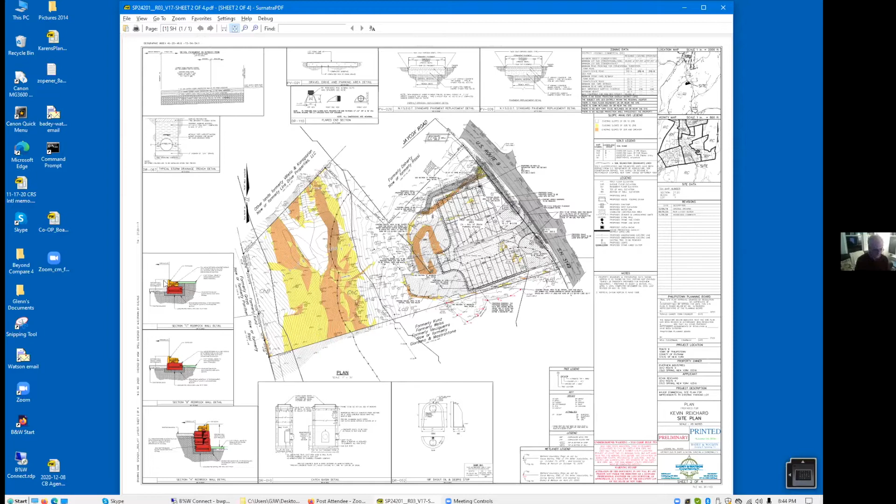So just to give you an idea, if I can maneuver myself a little bit — here's a detail of what we're talking about. The rock would be, essentially, a bunch of large building blocks. They're on a drain stone foundation — I'm pointing with my finger instead of my cursor, sorry — they're on a built foundation.

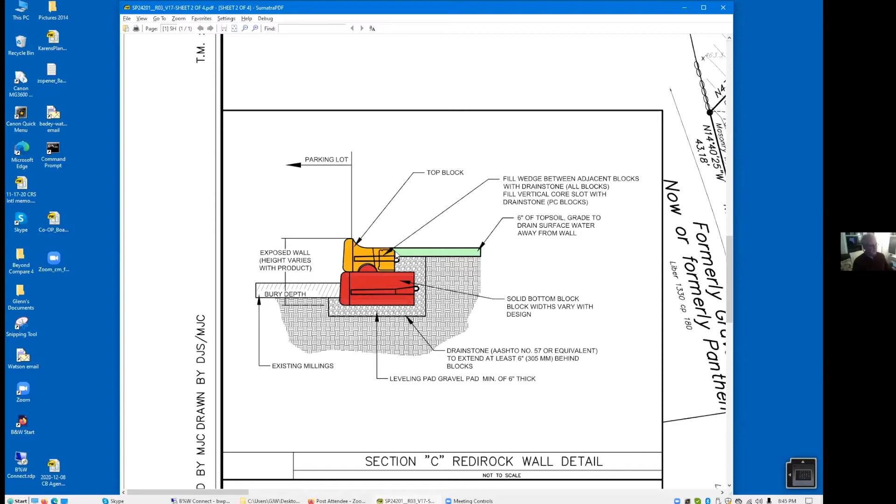They would be built up to a height above the ground — actually it will go one block higher than this — so you have your pavement on one side against the wall. It would be protected from the pavement crushing and breaking and then migrating into the wetlands, and it would also be a significant barrier. Mr. Reichard's point is that it substitutes for both — it's much more durable than a chain link fence, which I'm sure you've seen plenty of falling into disrepair.

So that's the major physical change. We would like to use the tailings that are on there, which are macadam tailings, and push the macadam in and roll it. We showed you this before, where we have directed the drainage across the parking area to the north side. The question, I think, at some point — maybe in Max's letter — raised a solid impervious surface. These are tailings, they're rolled in, and they are impervious in terms of any drainage or anything like that.

There certainly will be some voids in it. So, those are the two major changes.

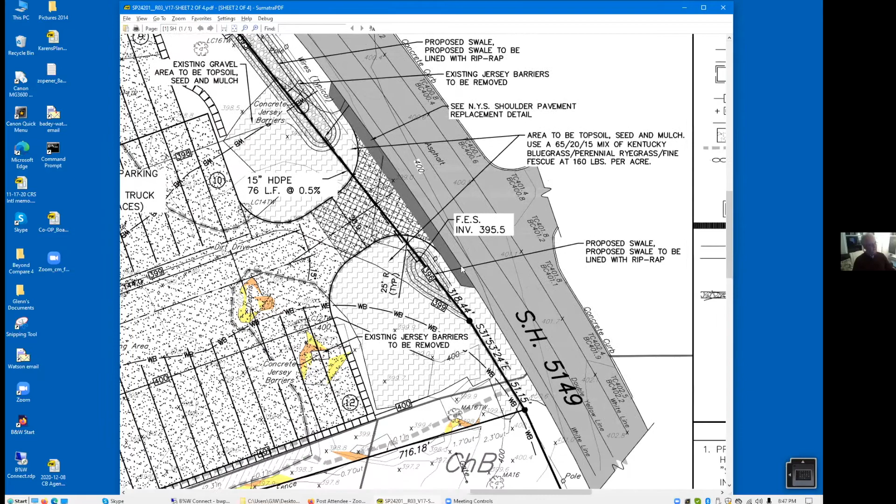As an aside, although not directly affecting your concerns, we have met with the DOT. We have drawings, I don't think we've actually submitted them, but we have met with the DOT. They are certainly in favor of us controlling the intersection. There was a bit of a sight distance issue to the north, but it's just a matter of taking out some plantings and making sure we don't make this berm too high. To the south, there's plenty of sight distance, so I don't think we'll have an issue there.

We've done our best to contain the paved area, and I think Mr. Gaynor, in one of his memos, said, well, how are you going to turn a tractor trailer around in this relatively small drive aisle? The answer is that Mr. Reichard has a machine intended for moving trailers. It's not like you come in with a big tractor. You come in with this little yard tractor that you use to make that maneuvering.

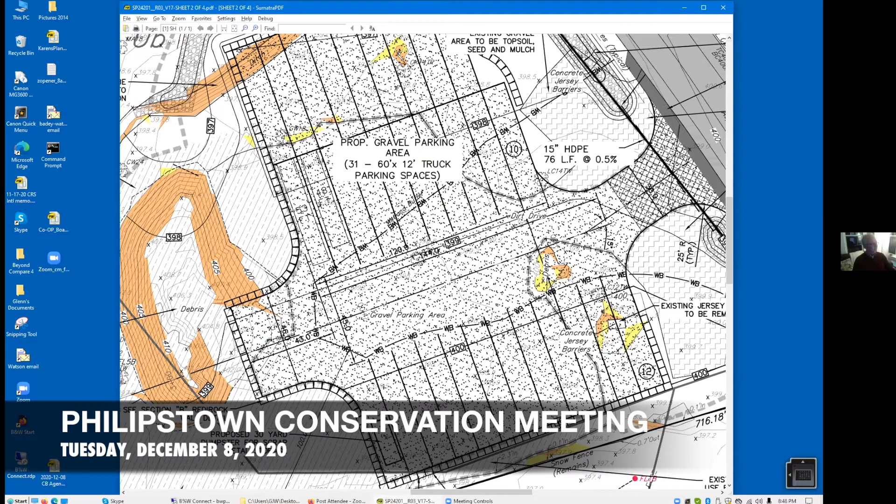Again, we've left the landscaping details off of here, and I think we discussed it last month, or 2 months ago, that it would be our preference, and I hope yours, that we would work with Max to develop a plan that would take care of the Phragmites over in the area towards the southwest of the parking area, and develop an acceptable landscape plan to restore the wetlands behind the parking area. So that's my whole story.

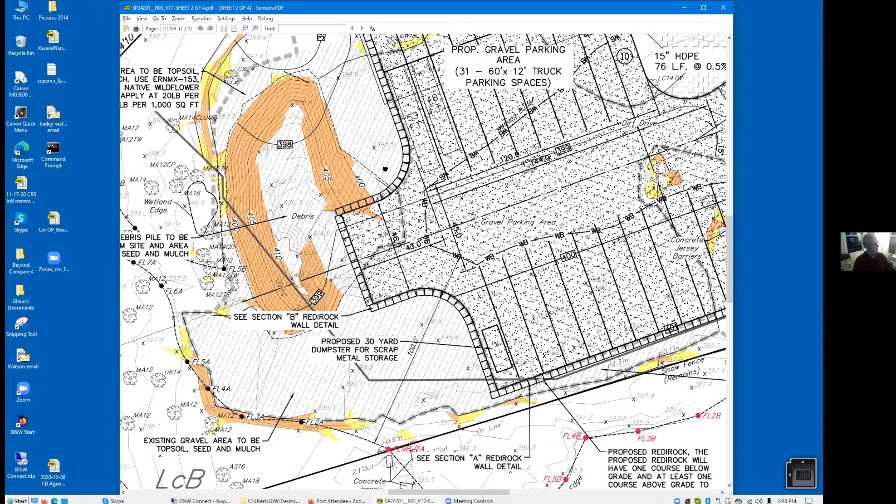All right, how high are- because it doesn't depict it in the 3 cross sections on the plan- how high will the Redirock be above grade? I have to check this, to be honest, but I think it's going to be 2 blocks above grade, which probably makes it 4 feet high. Okay, that's more than I thought. Okay, that's good. The blocks are about 2 feet tall.

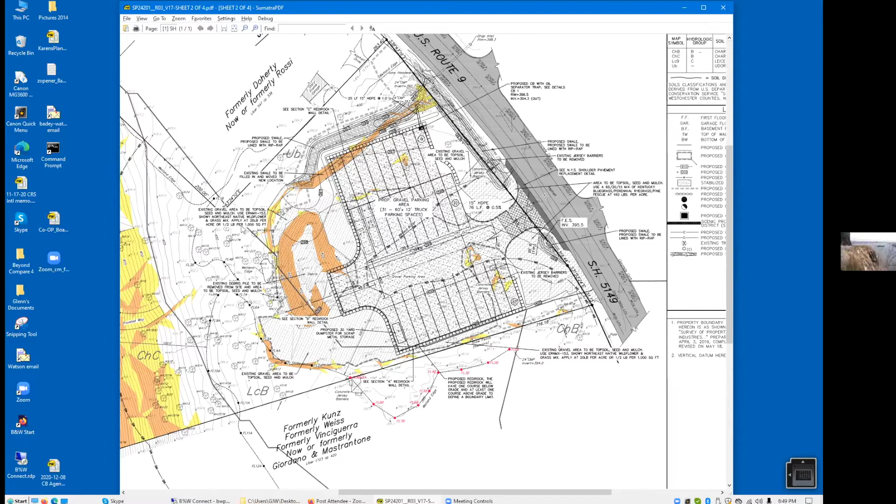And you're right, the detail didn't show that. It's interesting, on the detail you've got 3 different heights shown, where some are 3 block, some are 4 block, well some are 2 and some are 4 blocks. So it looks like the lower one, the bottom one, is being used as a retaining wall as well along the south side of the property, because I'm assuming that is an effort to build up the grade so that it drains north. Is that correct?

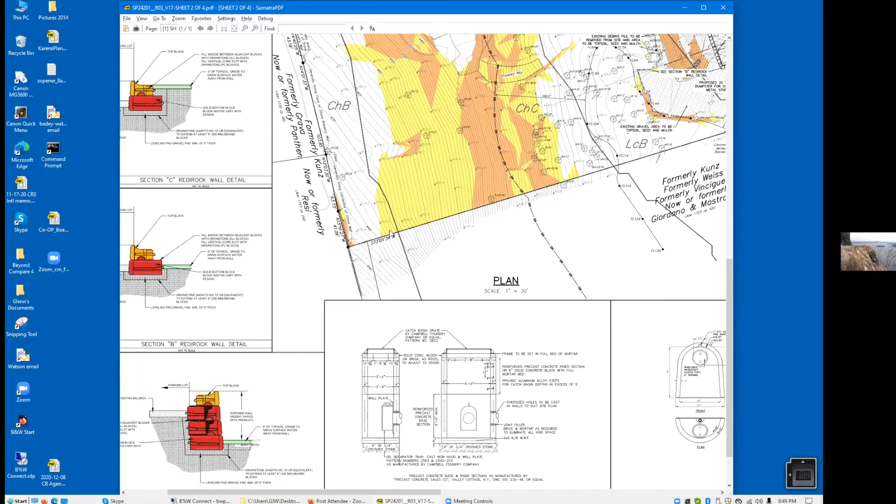I don't think we have to build up much grade. I really think it's more like the middle one, where we're really just trying to make a complete separation. No, I think that's a good solution. I'd be curious to hear Max's thoughts on that, but I don't know if you heard, Glenn, Max is ill. I just heard you say that a few minutes ago, yes. Too bad, all right.

Okay, so if I could refer to the letter that went to the planning board, installation of the chain link fence and curbing around the entire area seems to be rolled into this solution, as well as mandating that a completely impervious surface be installed over the parking area so no oil or other contaminants could wash away into right-of-ways, wetlands, or watercourses, which ties into the previous note about grading of the site towards a center drain catch basin with an oil catch containment contaminant filter that could be removed, cleaned, and replaced.

So this drain has now been moved to the far north corner. Does it include those things that Max was pointing out, the filter and so on? I didn't look at the details. Yes, it does. We did push it towards the north because we don't want to have a big puddle in the middle of winter. I believe that it does, but whatever detail Max wants on that thing, we'll certainly provide.

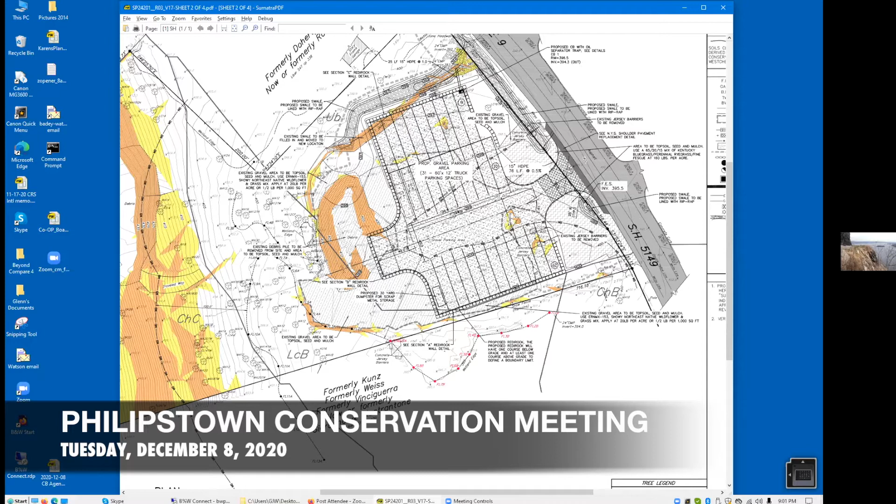So I think, subject to them working with Max on the planting and his final approval on the planting and restoration, I think they've done what we asked. Okay, I think the maintenance agreement is important too, by the way. I agree with Andy's comment.

All right, so then I will reach out to Max and let him know that, number one, we are looking for his input vis-a-vis the planting plan. And Glenn, you're going to look into what you can find out about the maintenance plan from the Appalachian market. I will, and the dumpster is getting relocated. Yes. And you're going to confirm with us what is contained in the separator, filters, and so on. Right, will do.

Very good, sir. Thank you very much. Okay, thank you. Thank you, have a good holiday. Thank you, you too.

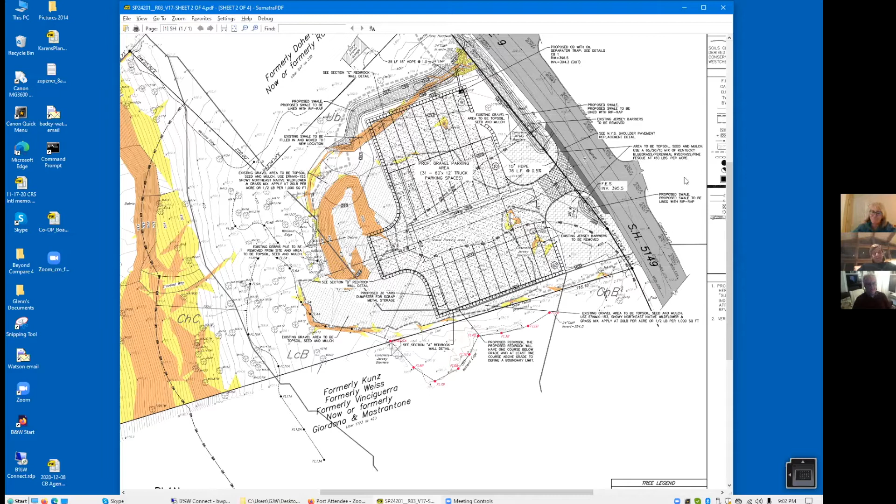Andy, do you remember that? Or am I just - I know with the Appalachian market we definitely had an agreement vis-a-vis the septic, because it has an atypical septic, but there were most likely grease traps too, because that whole site is in a wetland. Yeah, exactly. And when they were telling us about it at the time, they were somewhat newfangled - it was a drainage catchment that had a filter in it for oil and gasoline. Yeah, I think you're right.

I think we insisted that they give us some sort of maintenance schedule or maintenance plan. I really think that's probably part of their file, but Glenn, you'll probably find it in your files.

Maybe, although if you're going by there lately, my boss has torn the place apart. There's a big dumpster out there ready to get the bottom floor taken out, so you won't be able to find anything.

MJ, you kind of rattled my brain cells. I absolutely remember there was a grease trap on the southern corner of the parking lot. It was supposed to be there in case there was ever a gas spill. I don't know why I remember it being on the southern corner, since I don't see how a fuel leak would wind up over there, but I think it had to do with the pitch, unless that's the trap on the southern corner of the gas area itself, right next to the entrance where the air pump is.

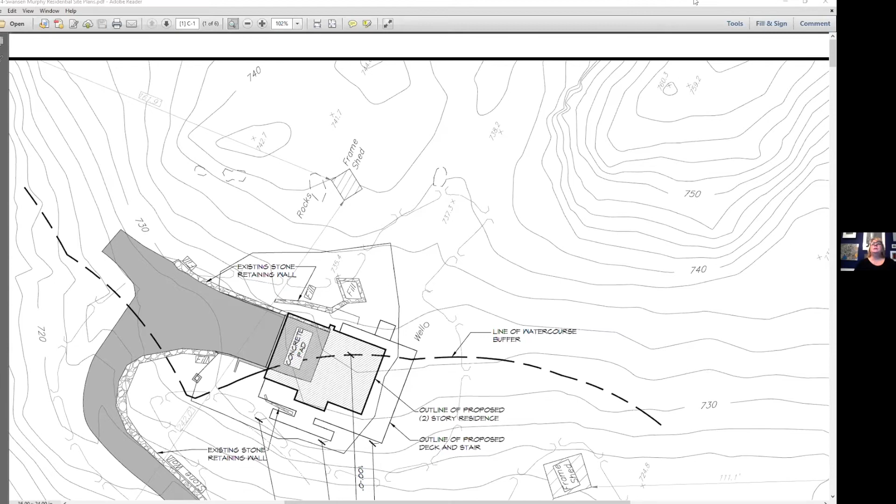So this is the existing pond and waterway with the existing driveway. This is the location where the house was, very similar to what was there before. And this is the location of the existing septic.

We understand that we're within the buffer area, and there was contemplation of moving the house farther up the hill. We can look to see if we can move the house slightly so that it would be out of the buffer. But the septic really basically has to stay where it was.

Could you blow up the area of the septic on your screen for us, please? Sure, hold on just a second.

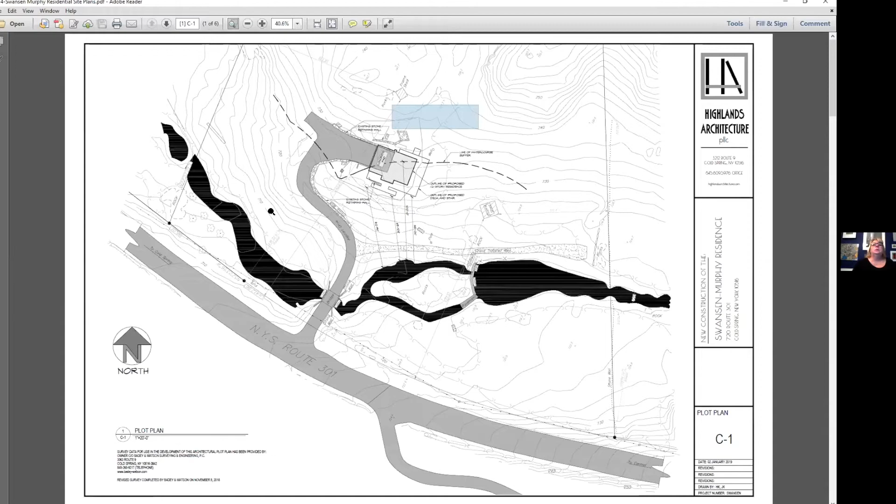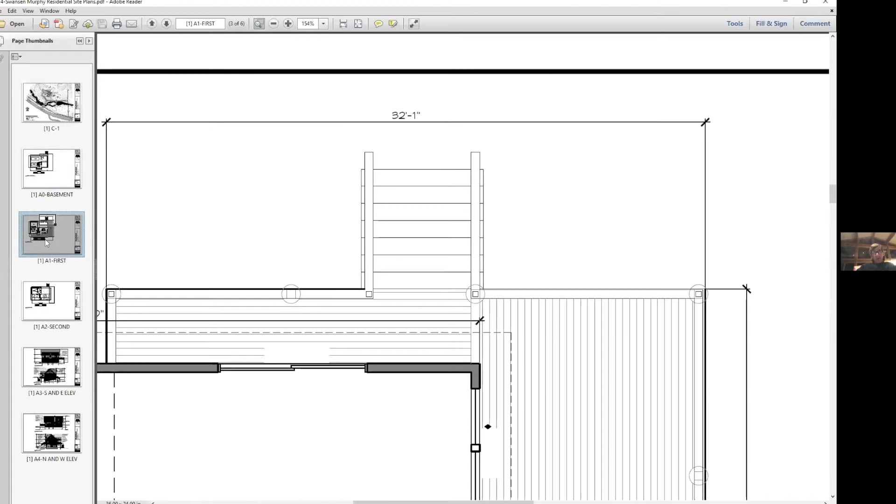So this plan, I think, just shows the distribution box. It does not. We definitely can't decide on anything tonight because we don't have a quorum, since Mark has recused himself. But we are going to need a plan that delineates where the septic system is as best as possible. We don't expect you to dig it up to show exactly where the pipes are, but I'm guessing you can estimate roughly where the pipes are and the size of the tank. And if there's any type of clay barrier or what have you, I think we need that to judge this. The size of the tank is a 1,000-gallon concrete tank.

No, I'm not interested in the precast tank. I'm talking about the septic field itself.

Yeah, no, I'm having a look. Here we go, I'm sorry, it popped off my screen. I'm on the other screen.

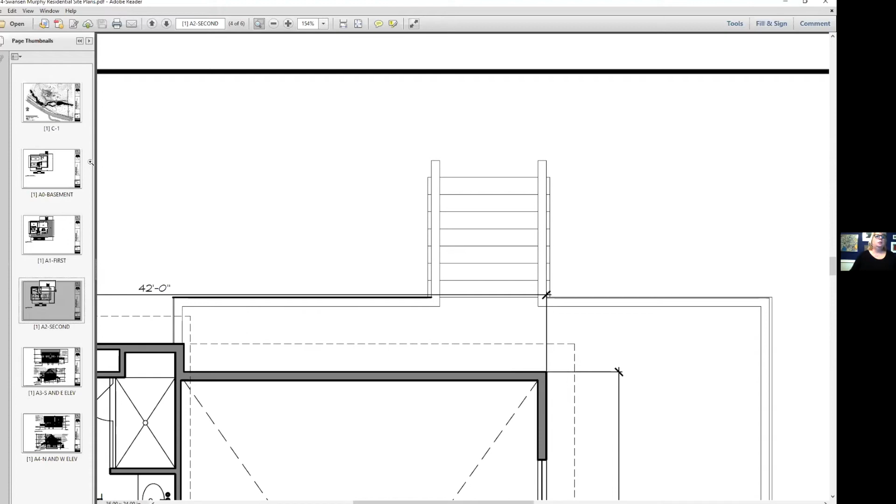We can look into our records to see exactly what we have, and we will FOIL the health department to see what they have as records. I have FOILed the health department. Besides the 2005 plan, I can share it, I do have it. But besides that repair system that was done by the Gallaghers, they have no other information.

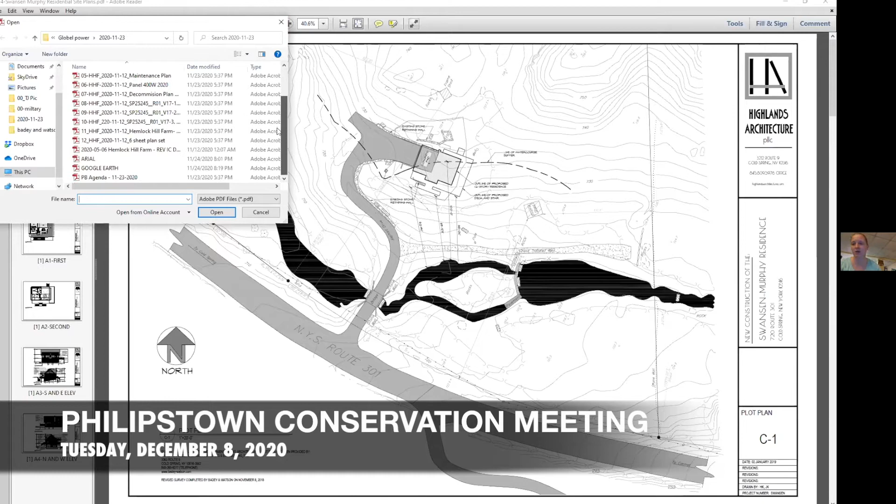What were you just holding up? Could you hold that up again, please? Yeah, absolutely. So this is the proposal for a sewage disposal system. It was done by the Gallaghers in 2005 and it was submitted and completed. I emailed this to everyone for the last meeting. Was that shared? I believe, Chloe, I do have that and I can share it.

Was this drawn by an engineer? Yes, I believe so. This was approved and completed by the contractor, which was Lines and Sons. They're the ones who completed the work. So it was Harold Lines and Sons, that's the contractor. It might not have been drawn by an engineer.

Because I do think we need to have the septic delineated on the site plan, because otherwise I don't think we're in compliance with the town's ordinance. Yep, we can show a reputed location of it where we suspect it to be. As far as the records, we'll show what we have and put it as a reputed location. We can update the plan for that.

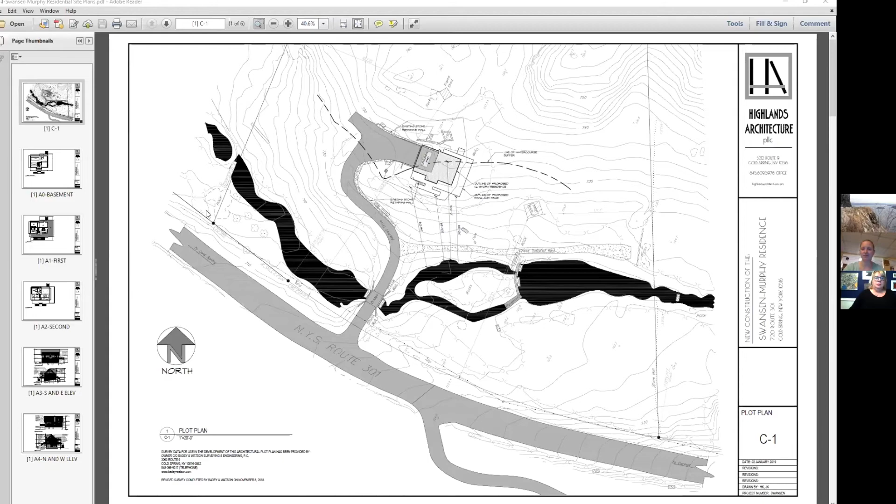All right, so now we have some new business. Shapiro on Indian Brook Road.

Looks like we are just reviewing the screen porch, not the garage. At this point we can talk just for a second if the applicant wants to introduce us, but I would say the obvious question is this is a non-conforming building. The deck is in the buffer, part of the house is in the buffer, it looks like. I'm not sure if that's a house or a deck to the north. But we are increasing the non-conformity by building an impervious structure substantially into the buffer.

I guess would the applicant or the representative like to introduce themselves and tell us a little about it? Yes, hi, my name is Juhi. Actually, the name comes up as D. George, who registered on my behalf, but my name is Juhi from River Architects. And I am here to represent our clients, Eben Shapiro and Sue Atkins, residing at 420 Indian Brook Road. As you mentioned, it's a limited site, and they currently have an existing deck

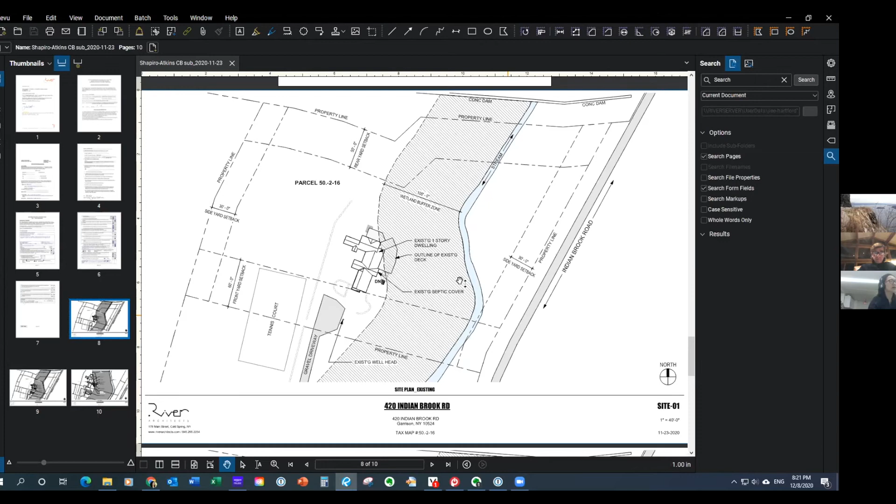Okay, can you see my screen? Yep, yes. Okay, so this is the main house. The property boundary is, I believe, a little over 5 acres. However, due to certain characteristics of the site, the buildable area is limited to approximately this area. And we have Indian Brook Road running to the east of the house, and we are proposing, zooming in, to build a screen porch in this area.

Part of it, half of it, is an existing deck and step. We're proposing to build on top of that. The existing deck is about 18, almost 19 feet into the 100-foot setback. And we are proposing to be less than that, 17'4" maximum. The sauna would be tucked into about half of that area, and the patio would be probably about the other half.

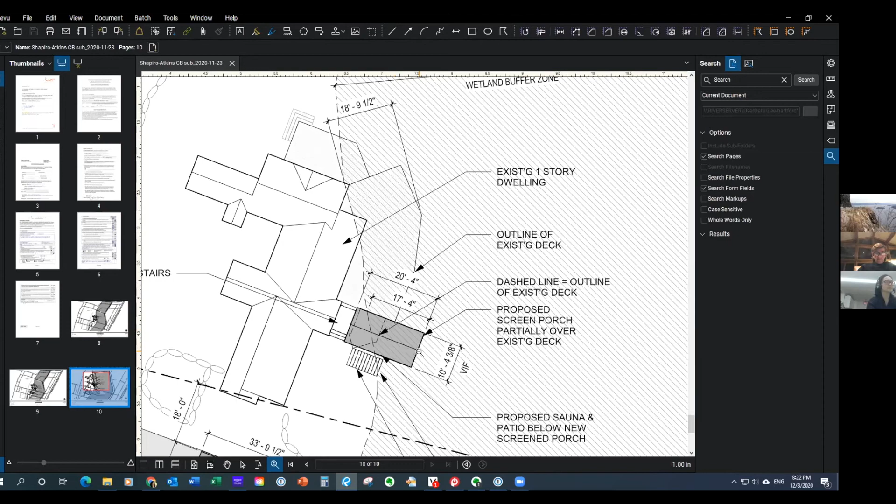Okay, could you possibly zoom out slightly on that image? Yep, those existing stone steps. Okay, I see, that's just coming down grade probably, and the existing stairs, proposed new deck stairs. Okay, I got it.

I think we need to have a site visit, because normally this is something we're dealing with not far away, where we have something non-essential being put in the wetland buffer. Because the first thing that comes to my mind is, using the screen, top-bottom, why couldn't this be moved more towards the bottom so that it's completely out of the wetland buffer? Because it looks like there's an area to do that.

Architecturally, it might not be ideal, and that's why I think we need to go out and see the site. Because normally, I don't think we would approve a screened-in porch that is going into a wetland buffer just because part of the house or an existing deck is within the wetland buffer doesn't mean we're going to repeat something like that.

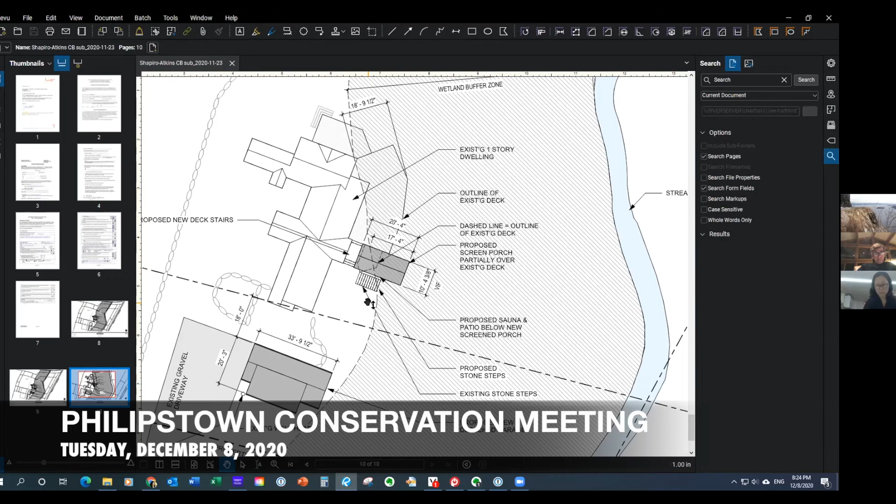Currently, the proposed location is adjacent to the kitchen, and our client is expecting to use the screen porch mainly for dining purposes. I'm sure you've explored many options, but once we go out and see it, it'll be easier. Could it just be rotated 90 degrees clockwise and sit here?

Even if you have thoughts online, seeing it in person all together again would be great. Our fearless leader Max, hopefully will be back on his feet shortly, and he would reach out to you, normally organizes a visit, and we will do so as soon as we possibly can.

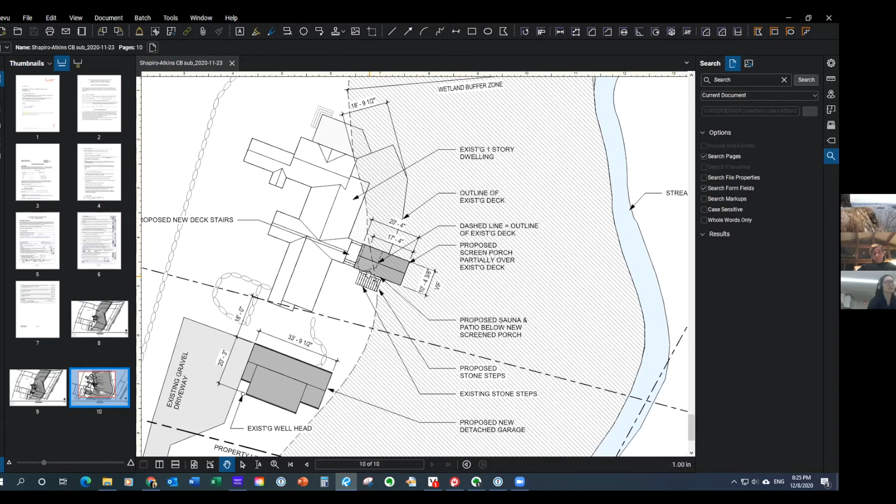Great, thank you very much. Have a good night. That's it, right? Yes, ma'am. Thank you. Okay, thank you.

All right, guys, I would ask Max about stormwater, but we won't be doing that. So I guess we're all done for the evening. Can I have a motion to adjourn? Unless somebody has some questions or comments.

Oh wait, Kelly has something she needs to tell us. Kelly will be leaving this position. This is going to be my last meeting. I will still be helping whoever comes into the position, but I've been asked to move on to work next to Tara as her deputy clerk, so I've chosen to do so.

Congratulations, that's terrific. I told Mark I was toying, I didn't know what to do. I was going to miss everybody, but I think it's going to be a great opportunity for me. I'll still be around for a while training the new person, but I'm going to be moving on. Moving on up. Good for you, Kelly, good luck.